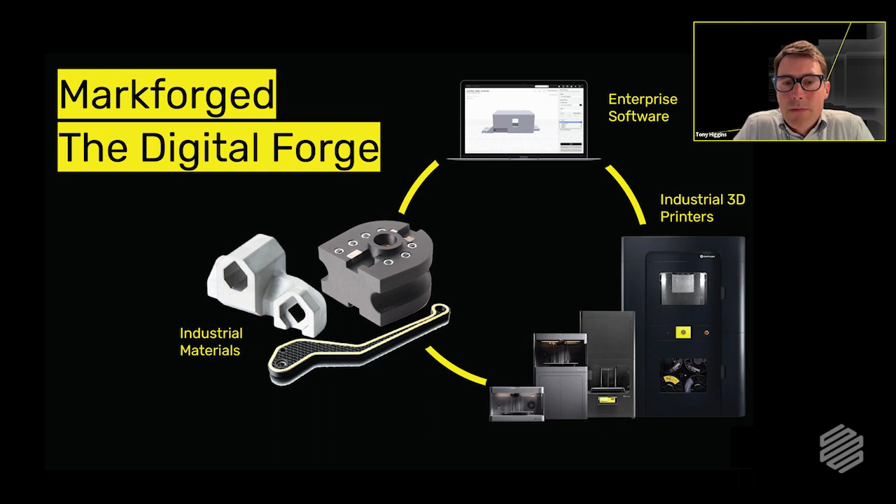So we just last year launched a new version of our offline Eiger, which has the ability to connect to private networks. This is important. We have a Marine Corps program that we support where printers at the point of need are distributed. When the Marines have the ability to connect to their private network, the MCEN, they're able to pull down parts from approved part libraries and send print jobs over the private network wide area. All right.

All right, and then just kind of set the table. Markforged as a company is working with customers across multiple verticals. We represent aerospace and military customers and also actually space exploration, but we also have automotive customers. There's even customers in the healthcare and medical space, as well as probably our bread and butter, which is industrial automation, large manufacturing, as well as small manufacturing companies.

All right, just a quick snapshot there. All right, so I just want to highlight this before we jump into the things that we're doing to help with the adoption of additive, because I think this is relevant. Earlier this month, on May 6th, President Biden announced a new initiative called AM Forward. And it's really at a macro level, he's trying to address supply chain challenges, inflation, and also ensuring that the government can get the products it needs from the large, kind of think of it like the tier one lead systems integrators, A&D companies like the Lockheeds and the Boeings of the world.

So this initiative is going to have several, 5 initially, but probably it's going to go beyond that, maybe 8 to 10 large scale aerospace, defense type companies that will be pledging to acquire 3D printed parts from their supply chains, small and medium businesses. So I think the key message here is at the highest levels in the U.S. government, there's an effort to accelerate the adoption of additive to help with some of these supply chain challenges.

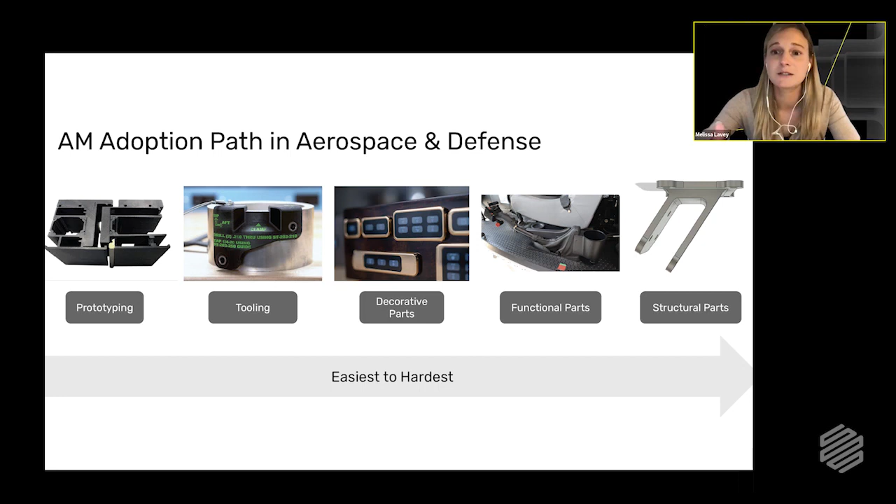Really, again, the kinds of problems we're looking to solve revolve around what our customers are doing with the printers and the software in our system and the problems that they're trying to solve with it, from the beginning stages of prototyping through actually printing parts. The goal here is not to deliver a Markforged product update or sales presentation, but we are going to talk about some of our technology in the context of what we're hearing from customers and what we're developing for customers to help make it easier for them to adopt the technology. So we're going to highlight a couple of our printer platforms, some of the things we're heading towards on the software front, and then we'll focus on the materials that we're adding. All right, so please keep that context in mind as we dive in here.

Okay, so the first one is something I've been directly involved with over the past 3 years since I've been at Markforged, and it originally developed as a request that we heard from the Navy and the Marine Corps for point of need printing. So they had been using our industrial and desktop polymer printers like the Mark II and the X7. And they came to us and said, if you had a way to take a COTS printer that already exists, that's already been tested and proven in our community, and just package it in a rugged kit along with the spare parts, like tools, extra material, consumables, but even things that might not be considered a consumable, like a spare print head or a print bed, items that if they fail, then you're out of commission. Package all that together into a rugged kit that two people could carry and move around from tent to tent.

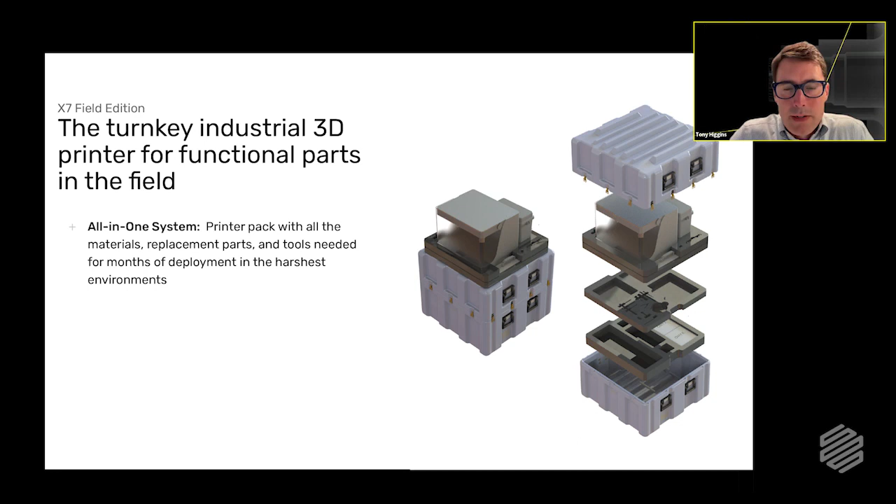That would help us with several of our use cases for where the Marine Corps is heading, and ultimately probably also customers in the Army and the Navy as well. So this is called the X7 Field Edition, and it's just what it sounds like. It is our COTS X7 printer, all in one package. It does, as I mentioned earlier, have access to our offline Eiger software. So if you are in a situation where you're not able to connect via the internet to your Eiger libraries, you can connect to your private network when you have the ability to do that, and pull down parts that have already been in a digital inventory.

And also, as part of this program for the Marine Corps, we updated the operating system on the printer to make it STIG compliant, and put a heavy eye to the cybersecurity and security features in the software, the OS as well as the offline Eiger.

All right, so that's the X7 Field Edition, a little diagram there of the different layers inside the Pelican case.

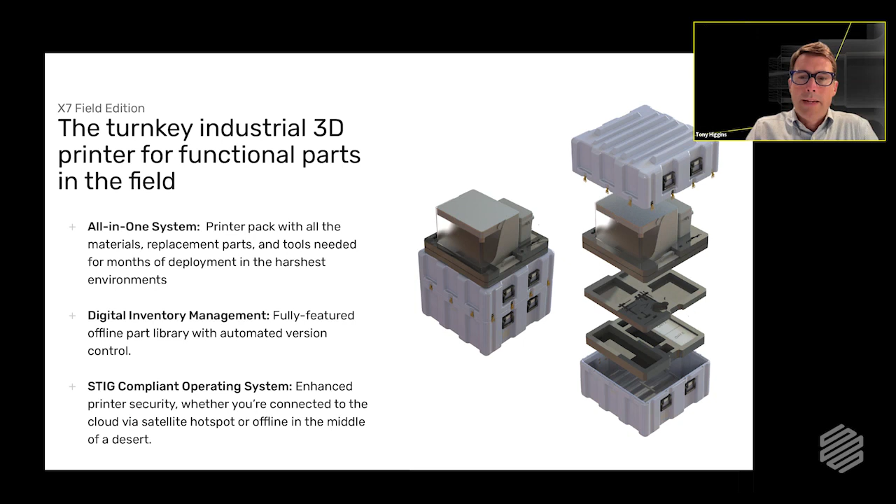The next thing we've added - and I've been here 3 years, and in almost every meeting, especially with existing customers familiar with our Onyx material, which is our nylon-based chopped carbon fiber material with continuous filament reinforcement - a lot of customers have asked for larger print volumes, a wider range of materials, and faster printing. So all of that has come together with a new printer we just started shipping earlier this year called the FX20. As you can see there with the person standing in front of it, this is a completely different form factor from previous Markforged printers, resulting in a bunch of new capabilities.

It's been announced, it was just on display at Rapid last week in Detroit, and it's now available in the market. Many of our reseller partners have these now in their demo rooms. So if this is of interest, please follow up later. The idea here is we're now having a platform that can address a wider range of customer requirements as 3D printing expands.

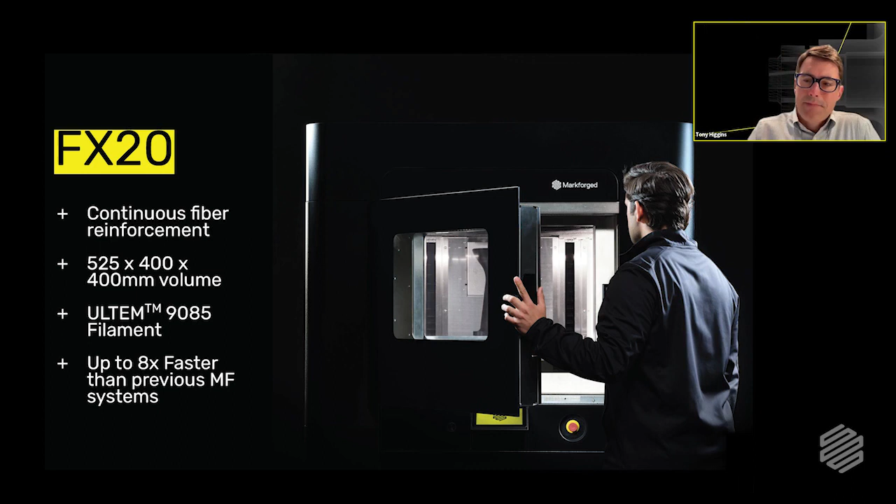Okay, and this is a new one - not available yet. Earlier this year, Markforged made its first acquisition of a small software company called Teton Simulation. Their software platform is being integrated into our management and slicing software, Eiger, and it will come out later this year. It's essentially based on FEA, or finite element analysis tools.

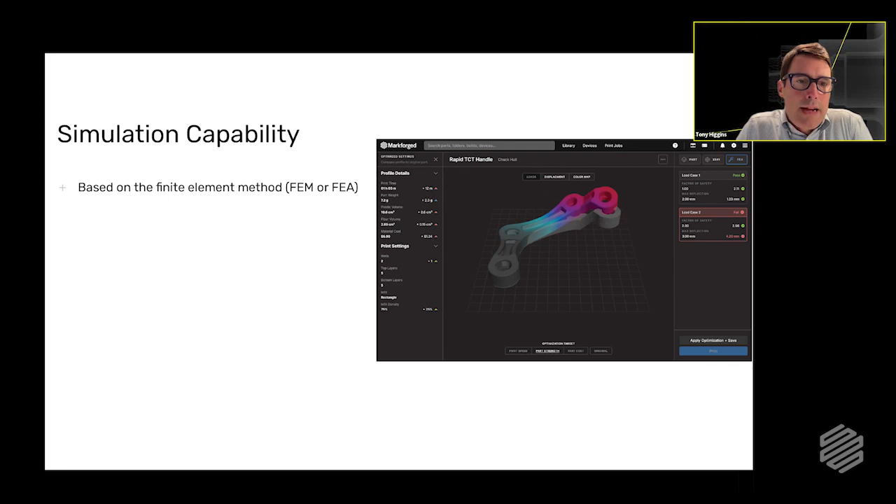So it's going to help customers answer the question: is a part strong enough? Where should I put continuous fiber? What build orientation would make the most sense when we're going to print the part? And we hear this all the time.

I can picture very clearly a discussion with some Army customers at Rock Island Arsenal who said they liked the Markforged composite printers, but they weren't sure how to make recommendations on how much fiber to use. Is 3 strands enough? Is 50 strands enough? What's the right amount to get to a certain strength? We've never been able to answer that question effectively - it's always been, it kind of depends, you just have to try it several times.

So going forward with this simulation capability, we'll be able to make estimates on the strength of a part just based off the STL and the design once it gets loaded into Eiger. A very exciting new development that's heading our way, hopefully by the end of the calendar year.

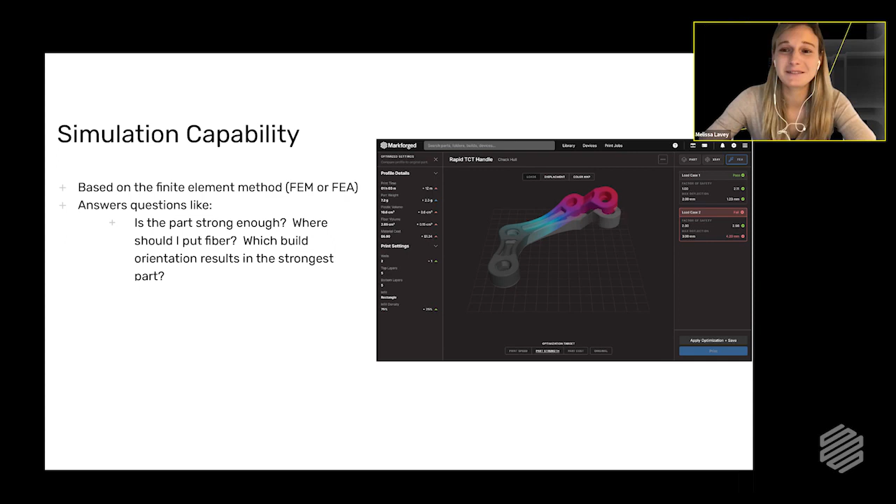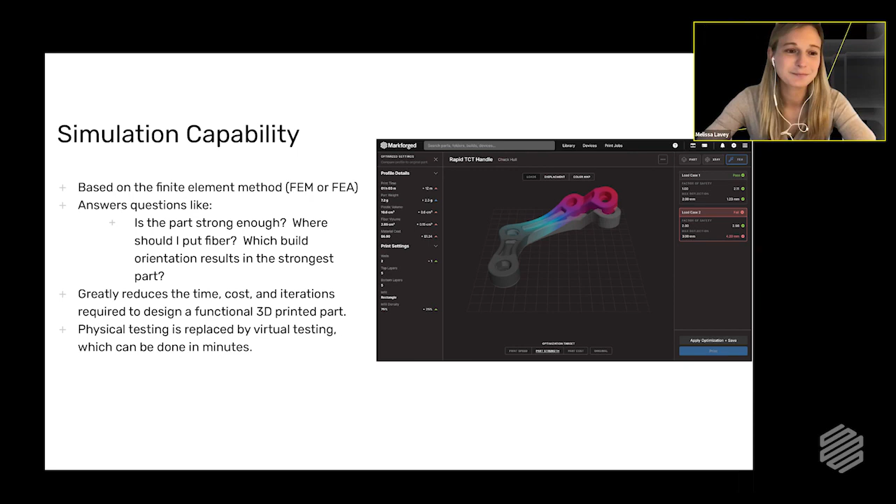And definitely a great tool to help decrease your prototyping and design development phases by, instead of printing and testing, being able to simulate instead. Yep, that's correct. Thank you.

A little background about Markforged materials. We offer a wide range of materials that support different use cases across aerospace and defense and other industries. Our materials are fabricated by Markforged in-house to ensure quality and repeatability. As part of the Digital Forge, our materials are tightly tuned with our printers and software so that it takes the worrying away from our customers of getting the right print settings. Markforged has already tuned everything so that you get your best in class print.

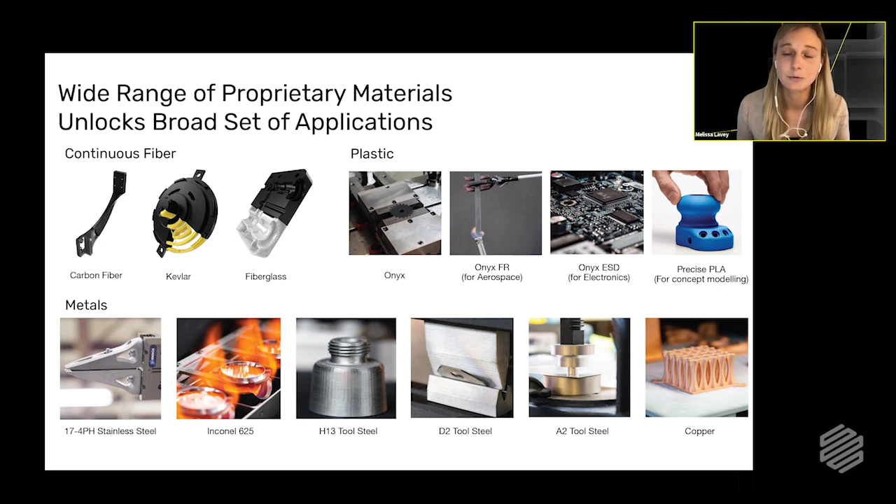So I know I saw a question that came through about aluminum. We don't offer aluminum, and it's not a great fit for our technology. But a lot of the weight saving properties you get with aluminum can be achieved with metal FFF printing by changing your infill patterns, saving weight. We're using stainless steel, so you can achieve some of the properties you'd get with aluminum out of our steel in terms of weight savings. All these materials were selected by talking with our customers, trying to solve problems using additive technology for their end use parts, tools, and MRO production.

A new material we just launched is called Precise PLA. On the last slide, we talked a little about Onyx and continuous fiber. The Markforged platform has printed those materials for some time, but we saw the opportunity to accelerate adoption of additive technologies, especially in prototyping and concept development stages, by adding this new material.

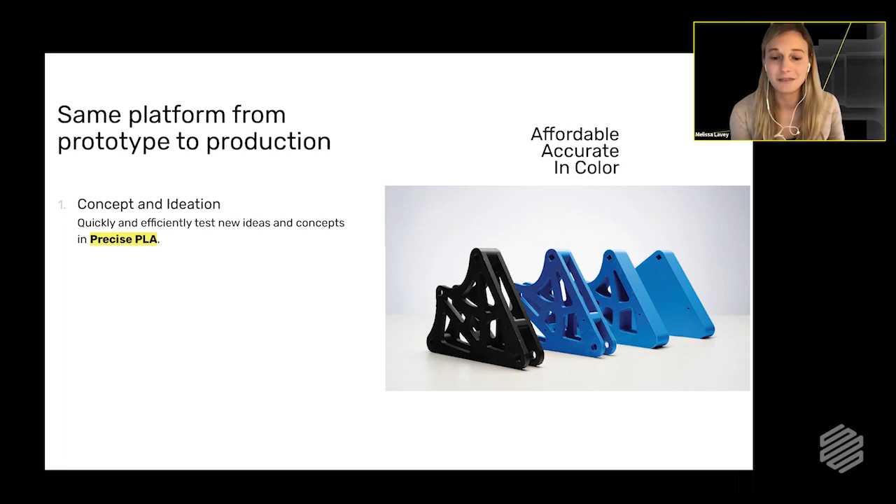Precise PLA is offered in 6 different colors and is a low-cost alternative to Onyx. Especially when you're in the beginning of your design cycle, it's great to use this material to quickly iterate from initial concept idea through to part optimization until you're ready to print your final part. You can use it for prototyping, then print your final part on the same printer, or something you'll later print in metal or even manufacture using traditional means. It can be used in a wide range of ways depending on what your end use part looks like. Precise PLA has best in class finish and repeatability.

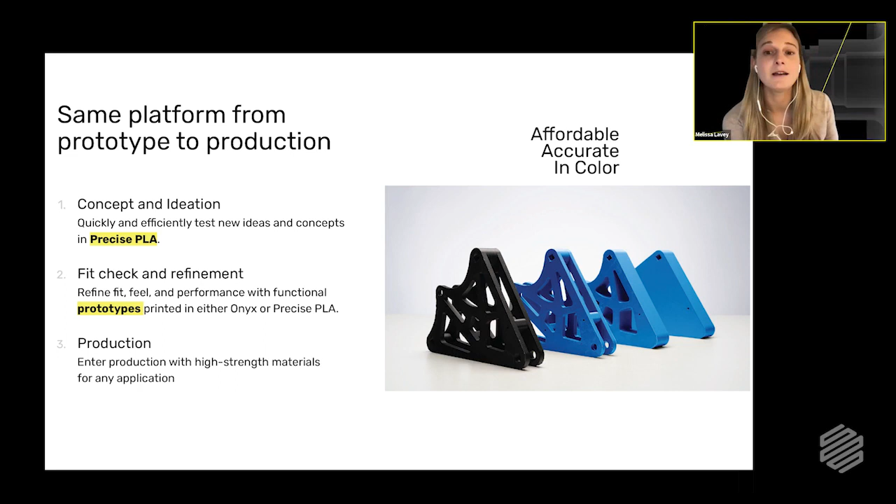So you can ensure the design you're creating is going to be great before you go into production. In the picture, this shows how the blue parts were made - someone went from an initial design and optimization using Precise PLA and then printed their final part in Onyx with carbon fiber for added strength.

One thing I want to add here: over the years, we've often heard, especially from some of our military customers who have multiple brands of 3D printing, that they get some of the best parts off their Markforged machines, but they often weren't using them as much because they were hoarding the Onyx material, particularly in forward locations where it was harder to get and at a higher price point. So they would use hobbyist machines with commodity material. This Precise PLA is not the commodity version, but it's about 25% the price of our Onyx material.

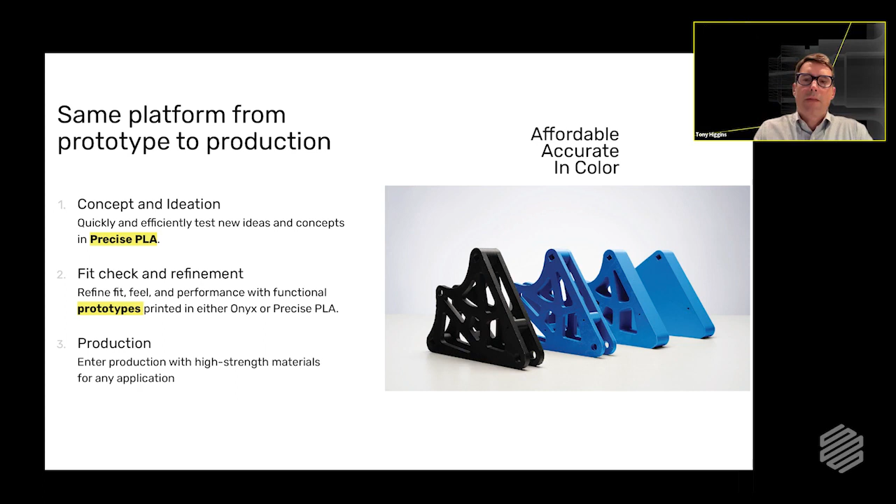Hopefully that'll make it easier for our customers to leverage less volume of printers and get more capability out of the same machine. There's no hardware differences or nozzle changes or anything needed on the printers to switch between materials. All right, moving right along.

This is another new material we just launched, as opposed to relating to the prototyping stage - this is more geared towards supporting production and end use parts. This material is Ultem 9085 filament and continuous carbon fiber for Ultem. These new materials open the opportunity for printing high temperature thermoplastics and reinforcing them with carbon fiber. The materials are heat resistant, chemical resistant, and flame, smoke, and toxicity compliant for demanding applications.

Ultem 9085 filament is well known, especially in the aerospace and defense industry. It's a great material, and adding reinforcement of carbon fiber unlocks new applications, especially in aerospace and defense parts that have high stringent requirements. This material is also traceable to support these stringent requirements.

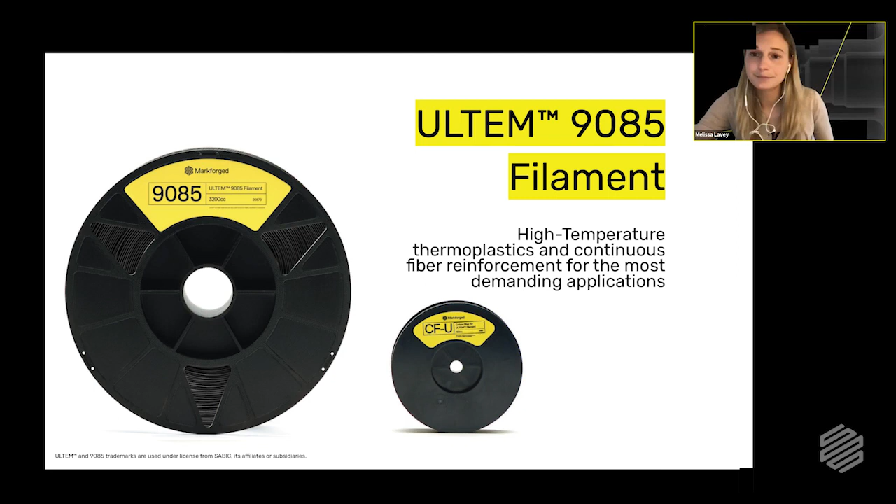This is, I talked about it briefly in a prior slide - it's the flame retardant version of Onyx. It comes with full traceability, and carbon fiber can be routed through the part as well. It's strong and lightweight, and it can meet flame, smoke, and toxicity requirements.

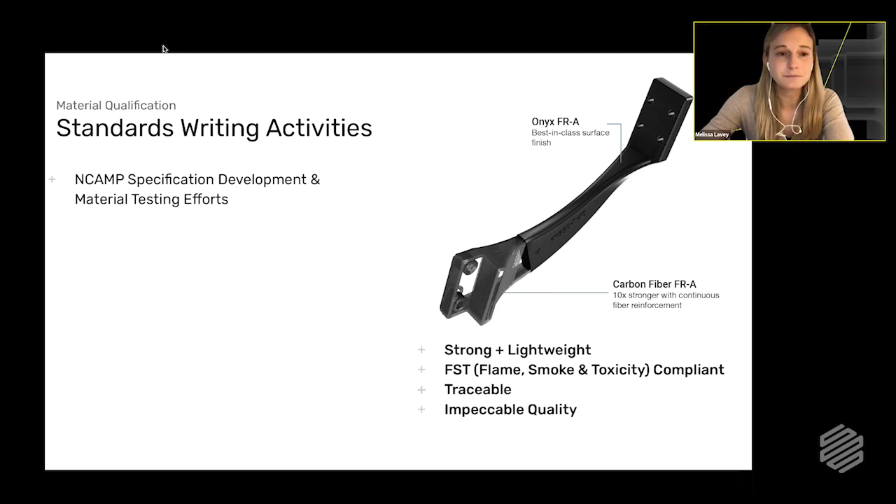Also, we've been launching and working with SAE on efforts to create an aerospace material specification for Onyx FR-A and carbon fiber FR-A.

And lastly, we have been participating in the writing of CMH 17, a Composite Materials Handbook for additively manufactured parts. This emphasizes process and material best practices as it relates to different materials, systems, and the platforms they relate to. These are all resources that will be used by industry and government to support creating additively manufactured flight or high requirement system parts.

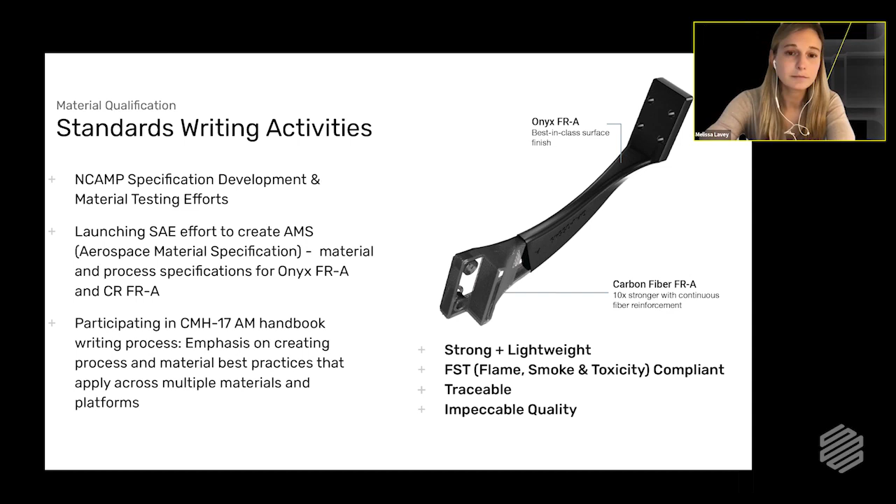Okay, hopefully that gives you a snapshot of where Markforged is heading. A lot of these activities, particularly when I shift to the next couple of slides around what we're doing to address the people and process challenges of adopting AM, are being made available because of the additional staff we've added at Markforged, focused on supporting these standards and also supporting workforce development. That's the Markforged technology component of what we're doing to drive adoption.

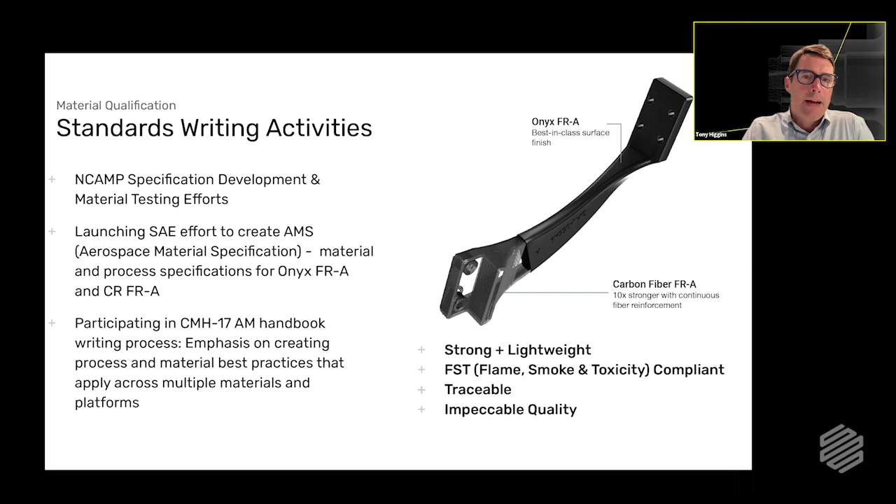We're going to focus a little more on some of the process items now. I'm going to talk about security. Melissa, I'm not sure if I can view the chat and Q&A while I'm going through it, but if you're able to double check on the side, that'd be helpful to make sure we're not missing something. And I think we've got a bunch of questions around simulation that maybe we can address at the end. Okay, I'll start answering some of the questions in the chat. Thank you.

For many of our customers, we have somewhere in the neighborhood of 15,000 plus systems deployed over the past 9 years. The great majority of those customers access the printers via a cloud-based online version of Eiger, which lives in the secure AWS public cloud. We also have an offline version for customers who aren't able to participate in the public internet, which runs in a complete air-gapped environment. It does have the ability to connect via private networks so you could have fleet management and drive print jobs over a fleet of offline printers.